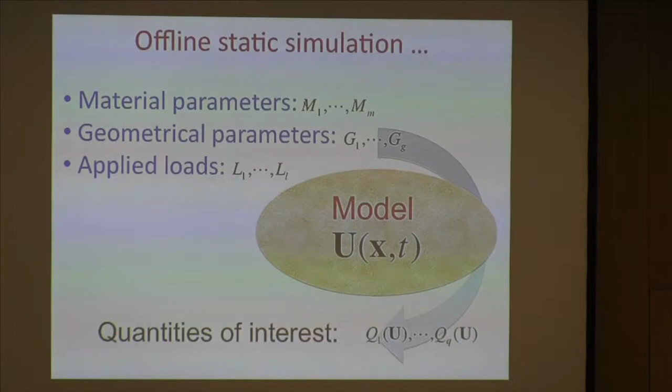So, as soon as you compute your unknown field, you can compute all the variables of interest that depend obviously on this solution. Thus, it's not necessarily the solution itself. It's something that depends on it. And this is the classical numerical simulation. We can conclude: simple, yes, even easy if you have the code. But as soon as you change something, you need to compute again. You push again the button and you wait. So everything is easy, but probably it is not the best solution.

And sometimes you need to solve many times, because you are not only interested in one simulation, you are optimizing or making inverse identification. And in this case, you need to solve again and again. And each time, you need to wait. So, we are trying to solve this faster. And this is not new.

A long time ago, there were some guys that prepared something whose name is the chart, the abaque in French, el ábaco in Spanish. And what is this? This is something that these guys, who had a lot of patience, prepared offline, and in this kind of artistic thing, they introduced all the possible solutions of your problem. And this is very nice, maybe better than the standard simulation codes. Because here you can introduce one parameter, the other parameter, and you have the solution.

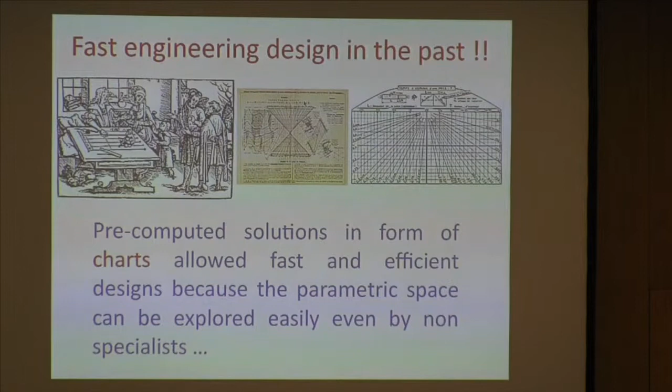Wow, this is nice. I need this. I need to compute all the possible solutions. But probably it's not easy. Because imagine that you have only 10 parameters. 10 parameters is nothing. And that each one can take 10 values. This means that the total number of combinations is 10 to the 10. And even for these guys that have plenty of time, it is too much.

Today, despite the fact that we have very powerful computers, I cannot pre-compute all the possible scenarios in my system. So, this is beautiful, but we cannot pre-compute all the possible scenarios because the number of scenarios explodes. This is the curse of dimensionality. Wow! So, I finish my presentation because there is no discussion.

Or maybe yes, we have some new routes in order to advance to faster and cheaper solutions. And the name of this is model reduction, with many families: meta model, surrogate model, the POD, the reduced basis, and the PGD. PGD is not better than these. It is not worse than these. PGD is one member of the family of model reduction, and as I like it a lot, as everybody knows, I will speak about this. That is one solution. There are many others to perform exactly the same thing that I'm performing now.

What is PGD? PGD has only two ideas. In my presentation there are only two ideas. In my life there are only two ideas. And maybe they are not my ideas, so it's quite simple.

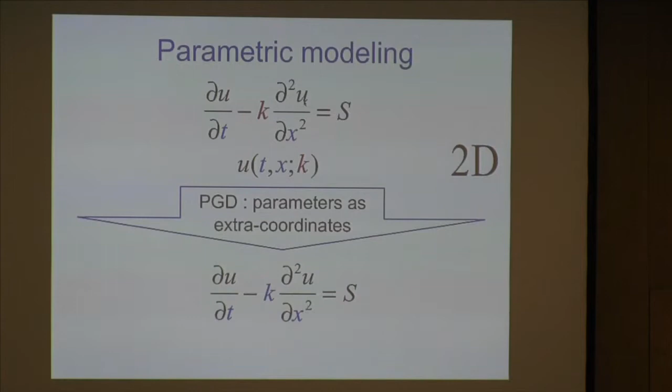Can we perform better? The first idea of my presentation is this. k is no more a parameter. k is a coordinate, like the space, like the time. Why? Because I would like to compute my solution at each point in a domain, at each time in an interval, and for each value of k in an interval. So for me, k is a coordinate in the space. It is a place in which I would like to compute my solution. So there is no difference. Maybe there is no derivative with respect to k, but this is a chance. So, first idea.

When you have parameters, when you have loads, when you have something that you don't know or that can change, you establish this is not a parameter. This is a coordinate. But now my problem was 2D and now it's 3D. And if I continue like this, 4D, 5D, 10D, 20D, 100D, 1000D, maybe it's too much. Maybe, but there is another idea. So, the first idea is clear.

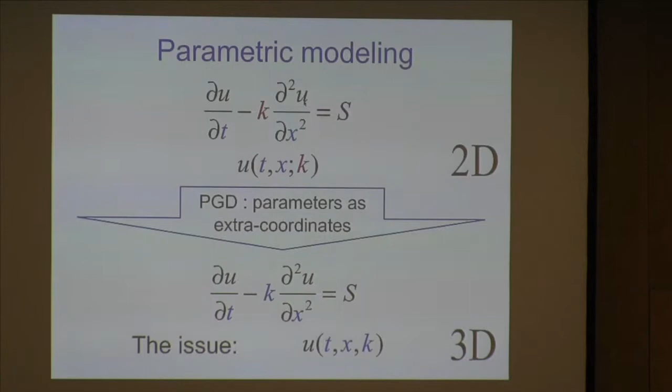The interest is impressive. This is my parametric solution. This is my chart, my modern chart. Why? Because as soon as you change k, you particularize. You don't need to solve again. Because you know your solution at this position, at this time, for any value of k in the interval that you choose. You need to particularize this high-dimensional solution that you computed previously and stored in your code.

And another advantage is if my solution depends explicitly on the conductivity, I could take explicitly the derivative of my solution with respect to k. And you are computing the sensitivity fields. You know at what position you have an important derivative of your solution with respect to the parameter. And this is very important when you are making optimizations.

And if you need second derivatives in order to have Hessians, you compute the second derivative, and third, and fourth. You can compute anywhere, because now my solution depends explicitly on the parameter. Okay, wow, this is nice.

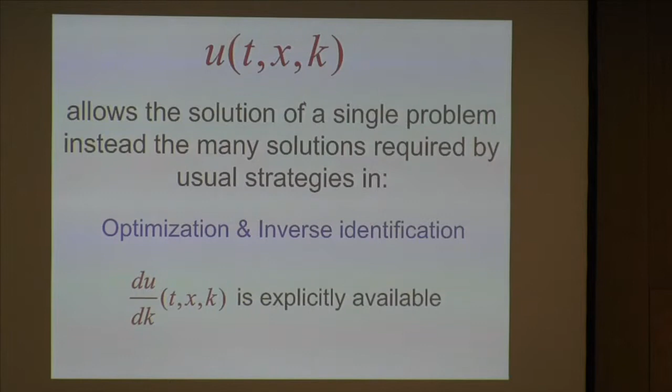And better, even in a stochastic problem, imagine that you know the solution at this position, at this time, for any value of k. At a given point, at a given time, my solution depends on the parameter. And if the parameter is not one value, my parameter is a distribution, my solution is not a value. My solution at this position and at this time has a distribution different to the one of the parameter, but that depends on the distribution of the parameter. So, in a certain manner, we are solving a stochastic problem in a deterministic way. And this is not so bad.

But the problem, very beautiful pattern, but the problem that was 2D or 3D, now we have plenty of dimensions. Okay, I'm very sorry, I will finish now the presentation. No, because there is the second idea.

It is the idea of Fourier, some centuries ago. He proposed the separation of variables. My solution depends on x, t, and k, rather than defining a mesh, one per mesh that explodes with the dimension of the space. You know very well that 1D is easy, 2D not too complicated, and 3D is in general complicated. I prefer to write that my solution that depends on space, time, and parameter can be written as a sum, in principle until infinity, but mathematicians tell you, okay, don't worry, this converges very fast. So in this case, this solution can be written as a finite sum of functions of space, functions of time, functions of the parameter. These functions are unknown, and I need to compute them.

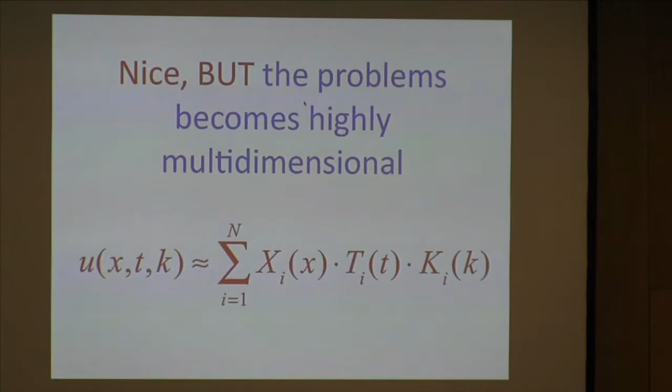How to compute this? Imagine we have my problem, my partial differential equation. I have my weak form, the classical Galerkin weak form that everybody knows. When I start, I'm looking for the first term of this sum. When I look for the first, I don't know this function, I don't know this function, I don't know this function. So the problem that was linear now is not linear, and I need to linearize. The simple linearization strategy is the fixed point, and the fixed point means I take these to start with a random value, a constant value you want. And in this case, as I suppose that this and this are known, I could compute X, because it's a problem with only one unknown, and it's linear.

With this function that I just computed, I compute T1. With the X and T, I compute the K. And I come back, and I have a nice loop here for the treatment of the nonlinearity, and this converges very, very fast. I promise you, very, very fast. And so now you compute the next one. When you reach the fixed point, this is known, and I compute the next one. I fix two, I compute this, with this and this I compute it, with this and this I compute this, and I iterate until convergence. And this converges in general very fast and very well.

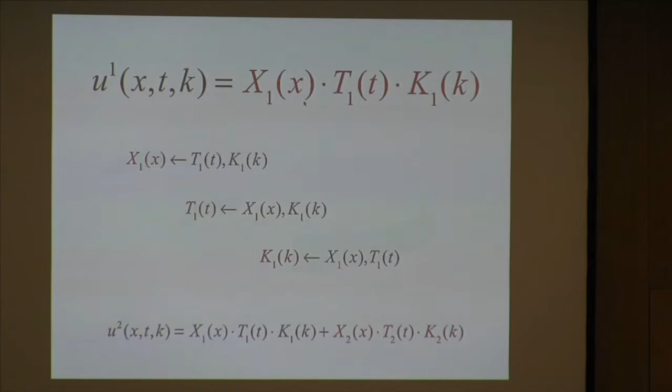And to do this, 8 years ago, with MATLAB and computers similar to this, we introduced a problem in 100 dimensions. 100. We put in each dimension 1,000 nodes. Oh my God! This means the equivalent of 10 power 300. It's incredible. The universe is 10 power 80. This is more than the universe. And I computed this in MATLAB in 20 minutes.

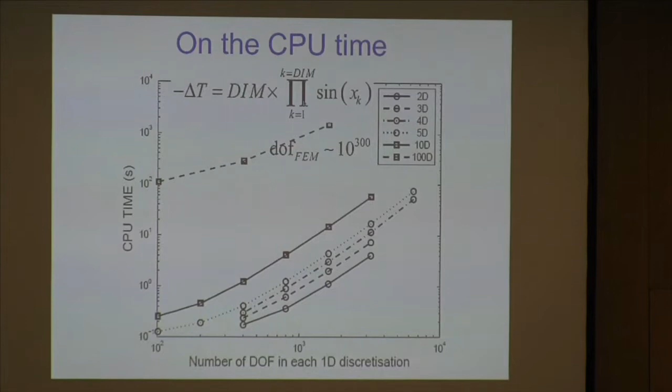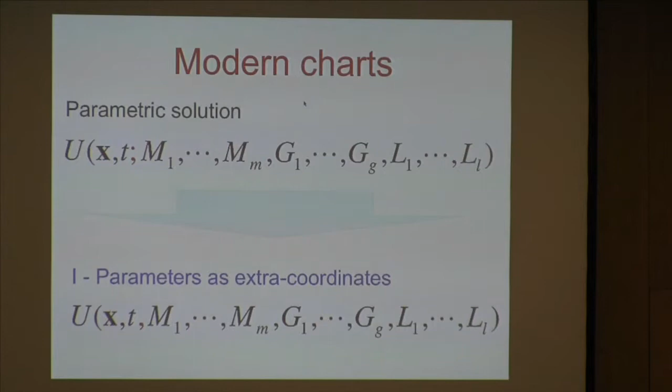Excellent. So we have a nice combination of only two ideas. One idea that is probably not mine, and the other no, because it's Fourier. So I have no ideas, but both run very well. I would like to compute modern charts that are parametric solutions. First idea, all the parameters are now coordinates. Oh, the dimensionality increases. Don't worry. We apply the separation of variables.

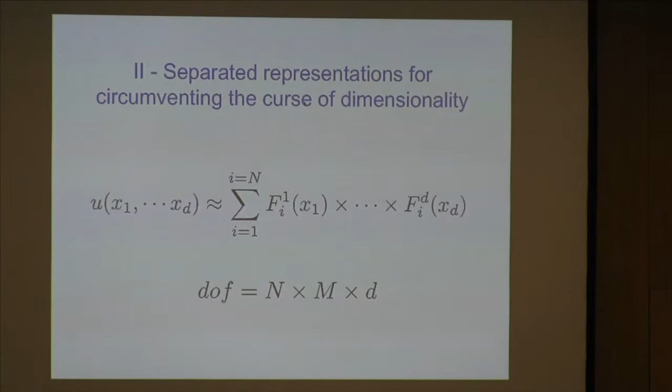And we compute one term of this sum at a time, and we iterate in order to compute this, because the problem is nonlinear. So you need to introduce in your computer two loops, and this converges, sometimes depending on the regularity of the problem, in some hours, in some days, maybe some weeks, but you compute this only one time in your life. Because when you compute this and you finish, you have a chart. And now we can use the chart.

What is the history of separated representations? Fourier, some centuries ago, Pierre Ladevèze a little bit later, because he proposed it.

Pierre proposed to separate transient problems as a sum of functions of x and t. He called this radial approximation, and he introduced this in the famous LATIN method that everybody knows in the world. There are some variants. Pierre also in mechanical problems introduced the separation of frequency and space, and Antonio separated the deterministic and stochastic coordinates to perform stochastic approximation. In my case, my group, my colleagues, Antonio, Elias, etc., we have three originalities.

The first one is to treat multidimensional problems that are coming from physics: Fokker-Planck equation, Boltzmann equation, and Schrödinger equation, problems defined in very large high-dimensional spaces. We apply this dimensional separation. This is one. Second, problems defined in a particular geometry, in a cube, or in a plate, or in a profile, I could separate the coordinates in order to solve a 3D problem with the price of 1D, or the 3D problem with the price of 2D. I will illustrate this later.

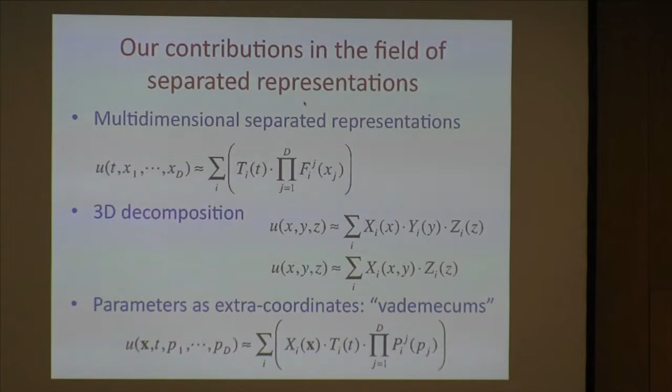And the last one is the Vademecums, the parametric solution. If you have a field that depends on space, time and a number of coordinates, write this as a sum of functions of space, functions of time, and the product of all the functions involving all the coordinates. This is maybe a little bit technical. Everything runs in MATLAB. You compute this only one time in your life, and you have the chart. And when you have the chart, you can perform real-time simulation, efficient optimization, efficient inverse analysis, and simulation-based control.

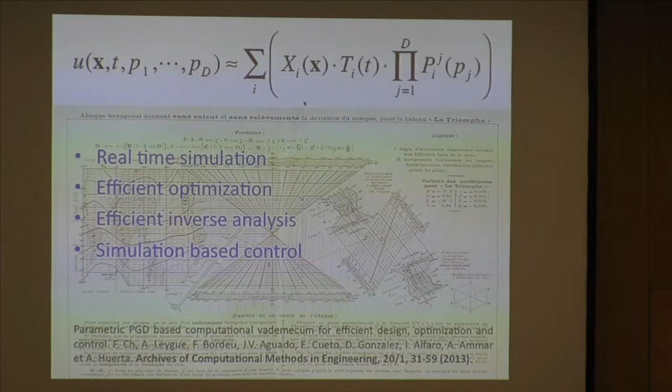So I start with applications, and I come back to one application that Elias just introduced in the other room: real-time haptic devices in which I would like to have an active feedback, very, very fast, for training doctors or for performing surgical interventions at distance. In this case, you need to touch and you need to have the real-time feedback. For your eyes, for having the real-time sensation, you need 25 snapshots per second.

For the haptic, it's a little bit more complex. When you take your finger and during 1 second you slide your finger on the table, there are 1,000 pieces of information going to the mind. This means that in order to have real-time feedback, you need to solve in the order of 1,000 problems per second. But this is not linear. It's anisotropic. Sorry, it's not my responsibility. But you need to solve this 1,000 times per second. This is crazy. Yes, but we need it.

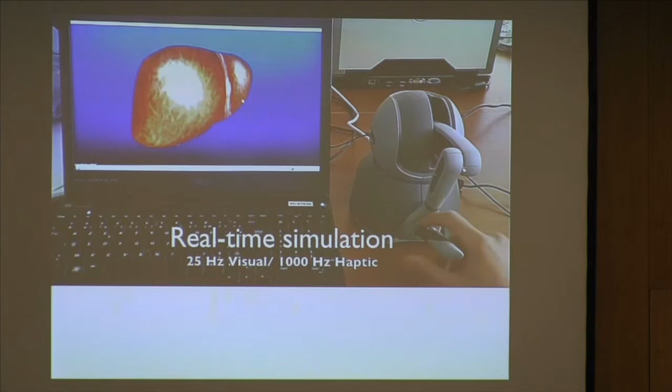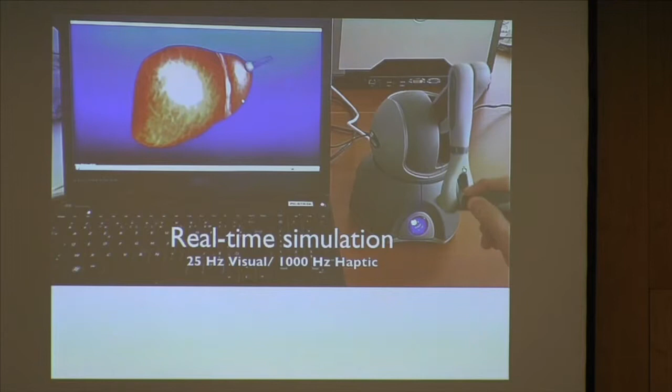There are similar simulations from Zaragoza on the website. This is the liver, and this is Felipe that manipulates this haptic device. And this is nice, real time. Why? Because we are not solving the problem, we are particularizing this solution. Excellent, this is very nice.

Okay, more applications. Another one: plates, shells. This is placed in the aerospace industry, in composite structures. Why? Because we need to solve problems in which sometimes there is not a plate and shell theory, and we need to solve the 3D in a plate or a shell in which the thickness is nothing.

And in this case, we need to use in 3D simulations millions of nodes. We cannot solve this. So we decide to play the game of the separation of variables, and each component of the displacement field writes as a sum of functions of the in-plane coordinates times functions of the thickness coordinate. And a sequence of 2D problems provides the 3D solution. This is 3D solution at 2D price.

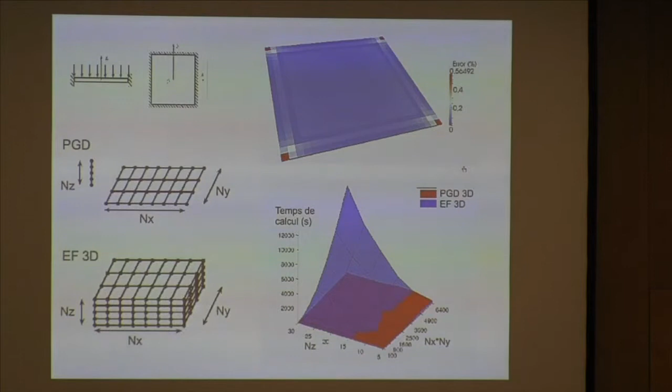Now, and it runs very well. If I compute the 3D solution as a sum of 2D problems and 1D problems, this is the computing time. If you are using a commercial code and you solve the same problem but using 3D elasticity, this is the computing time. Wow, nice.

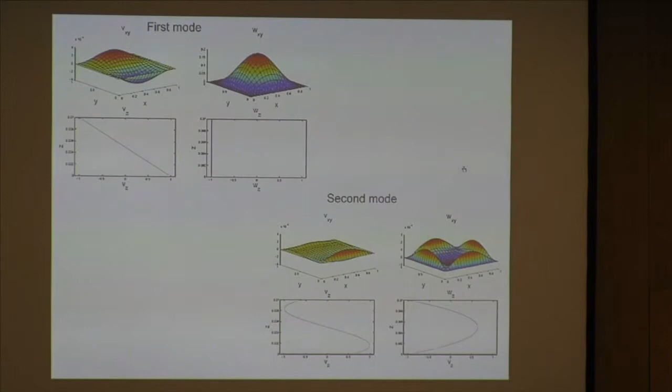If you are looking for the modes, this is the first function, the second, the third. It's very beautiful because the first mode is linear. This is plate theory. The second mode is a little bit more complex, but it only applies in the border neighborhood because there are 3D effects. And there is another thing, which is the angle between the section and the middle plane. It evolves, and when the thickness is very, very small, you approach 90 degrees. With the first mode, you are moving from Mindlin to Kirchhoff. And there is no locking. So this is quite nice.

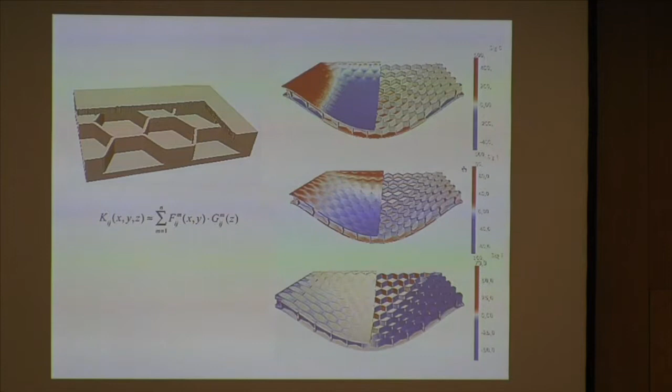You can apply this to complex geometries, because even in this case in which you have not the Saint-Venant principle, and you have not a theory of plates, you can define the elastic properties as a sum of functions of the in-plane and functions of the thickness, with only 3 or 4 modes. And in this case, you can solve the 3D solution of this problem, but at the 2D price. You can apply this to laminates. You have many plies, and we are putting in this direction 100, 1,000, 10,000 nodes, because this only affects the problem that is 1D in the thickness direction.

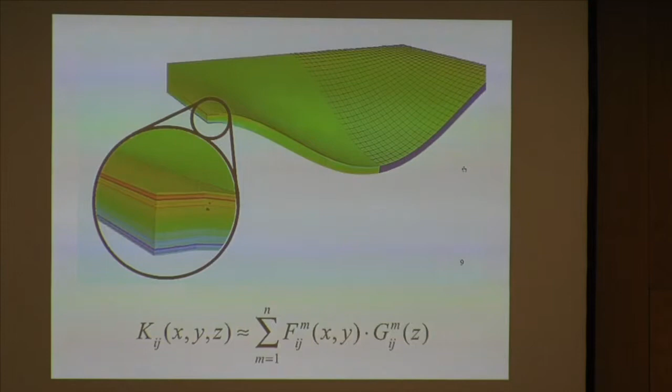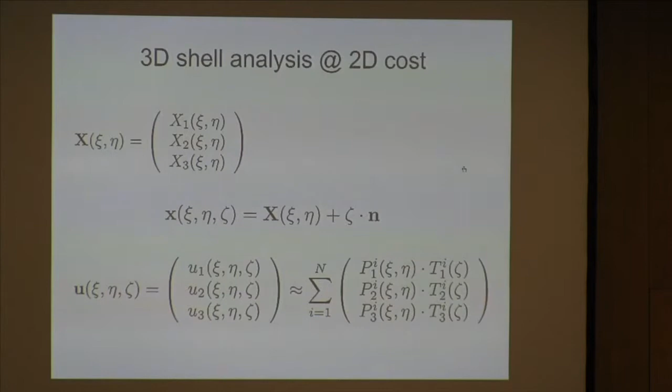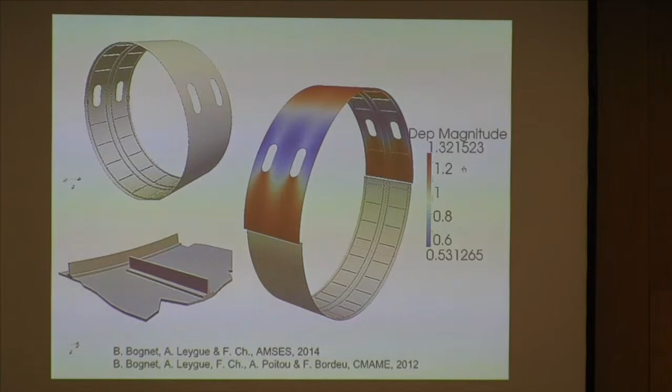You can apply this in shells. You need only 2 parameters, and apply the decomposition with functions defined in the middle surface and functions defined in the thickness of the shell. And then you can compute this. This is a laminate. There are 20 plies. We are putting in the order of 500 nodes in the thickness, and we can solve this complex structure. You will compute the 3D solution of this with a 2-dimensional cost. You compute very, very fast something that is quite impossible to calculate otherwise.

You can apply this also to the fluids in this kind of geometry, because you have this flow. And in this case, it's like a thousand sheets. Look at this, and now when you push, there is the cream that moves outside. And in this case, you need to solve the equations. In the resin part, you have Stokes. In the fiber zone, you have Darcy. We unify both in the Brinkman equation, and we solve this by putting 1,000 degrees of freedom in 1 millimeter of the thickness, and you can compute very fast thanks to the separation of variables, and you can evaluate the flow of the resin, and you can perform this kind of solutions.

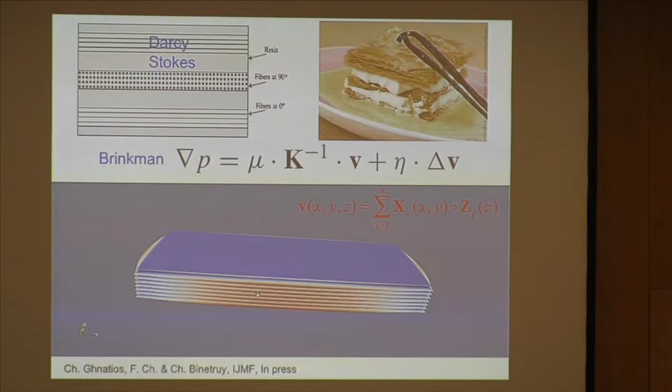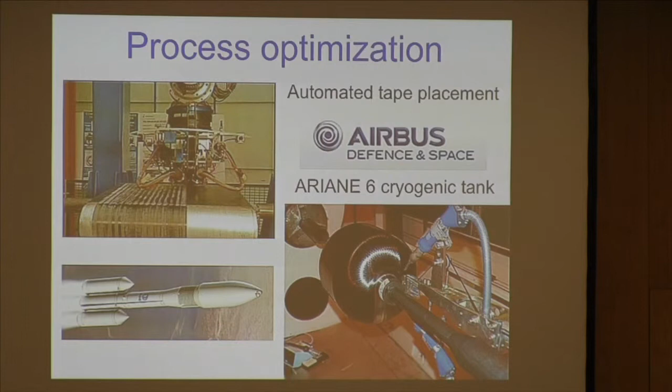Another one in process optimization is when we are performing this kind of processes with composite materials. It's quite difficult because you are laminating and the thickness of the tape is 0.1 millimeter, and the length is of the meter. And here there is no simplified theory, because this is multiphysical coupled, and you need to solve the 3D problem. And in order to optimize the process, you need to obtain the optimal velocity of the line, the optimal power of the laser in order to melt the polymer, the roller push in order to consolidate, and like this you can obtain the parts that exist in future aircraft, like the Airbus 350. And this is challenging because this is 1 millimeter, and this is some tenths of meter.

I'm doing a 3D simulation in which you are interested in optimizing the power of the laser, the velocity of the line, and there are also some thermal resistances because the consolidation is not perfect and there is a discontinuity of temperature through this interface.

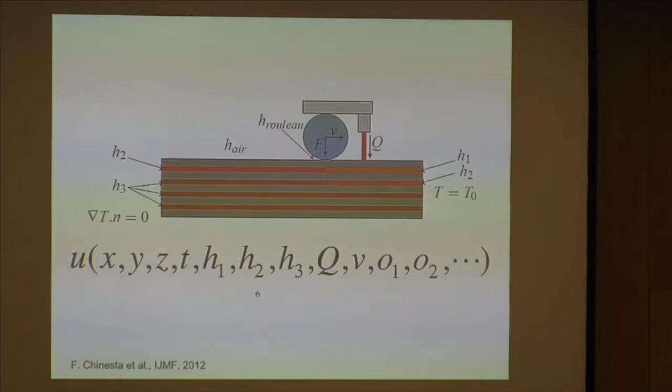And we propose to create a Vademecum that gives us the temperature at this position, at this time, for any value of the thermal resistances, for any laser power, for any velocity of the head, for any orientation of the liners. We solve this problem by introducing 27 coordinates. A simplified model is this. We introduce this in a tablet that is used in Airbus.

And this tablet, with your finger, this is a model chart, you can change any parameter and instantaneously you have the temperature distribution and two indicators, one for the consolidation and the other for the thermal degradation, because if you are applying too much power, you are degrading the result. And in order to appreciate

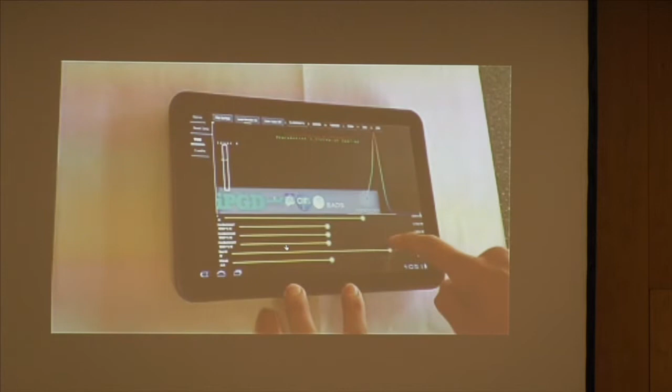the chart, you can appreciate you are changing any parameter, thickness, thermal resistances, the laser power, the velocity, and you can update immediately the temperature, and you can here notice the value of the consolidation indicator and the degradation indicator, and you can provide this kind of chart. And this is used even by non-specialist people in the industry.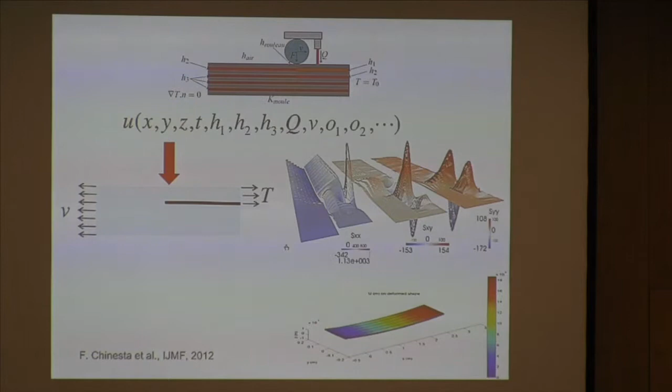And when you do the model with this profile of residual stresses, you can obtain finally the deformation of the part. That is very important in the aerospace industry. Another example is the parametric 3D solution of frame structures that will be presented by Adrien Leygue tomorrow morning in the reduced model session. And in this case, we would like to optimize this kind of frames.

It is composed of 6 beams that are in this position in the aircraft, A320. And in order to optimize this, we need to choose the optimal flanges thickness and the optimal web thickness. The problem is each beam is composed of a lot of elementary beams, and each one has 3 degrees of freedom, 3 parameters for the design. And this means that in all this structure, we have 148 design parameters, and we need to try to optimize this as fast as possible.

And this means, finally, we create, this is the 3 typologies of elementary beams. We create 3 abacus, one for each kind of beam, by considering the length, the 2 flanges thickness, and the web thickness as extra coordinates. And like this, we have a kind of Lego that I can assemble in order to have any structure.

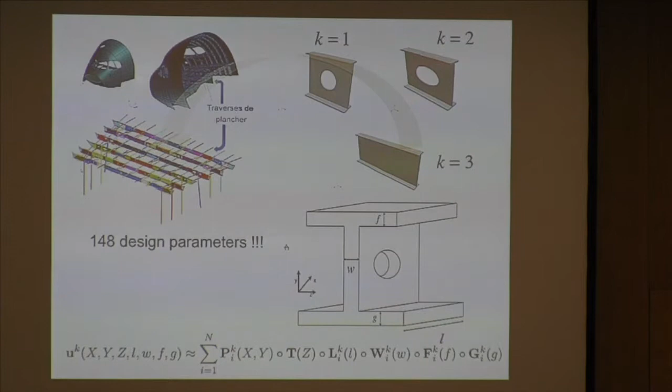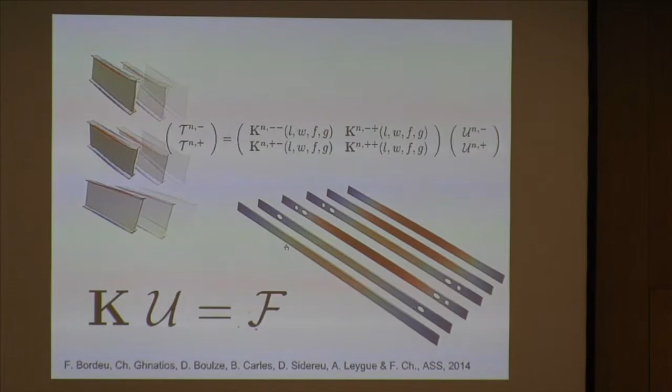So we have a kind of parametric structural analysis, and after when you compose all your Lego, you can assemble this in the stiffness matrix, and you can solve in less than 1 second, and you are computing the 3D solution everywhere, in any point of this system. So it's not exactly the classical beam theory. Here we are using a kind of 3D parametric beam theory in order to compute this. So for more details tomorrow, in the room.

And the last example is using the reciprocity principle in order to perform real-time thermal analysis. This is a collaboration with Antonio Elias. And imagine that you have the weak form of the heat equation. You see the form, yes? Okay, this is nice. Imagine that in this part of the boundary, the Neumann part, you apply a flux Q1. In this case, you obtain a solution U1.

Imagine that you apply a source term Q2. You obtain a solution U2. So you have for Q1 this solution, and for Q2 this solution. Now, I could assume that for the test function in this problem I could take U2. And for the solution of problem 2, I could take the weight function coming from problem 1. And I take this minus this, and I obtain this.

If my problem is steady state, there is no derivative, we obtain something whose name is the reciprocity principle, that I like a lot. Why? Because if I construct an artificial problem 2, I apply Q2 and I obtain U2. I can perform this offline. And now online, you enforce a Q1, and this integral gives you instantaneously the U1 in any point. And if you know U1, you can identify Q1.

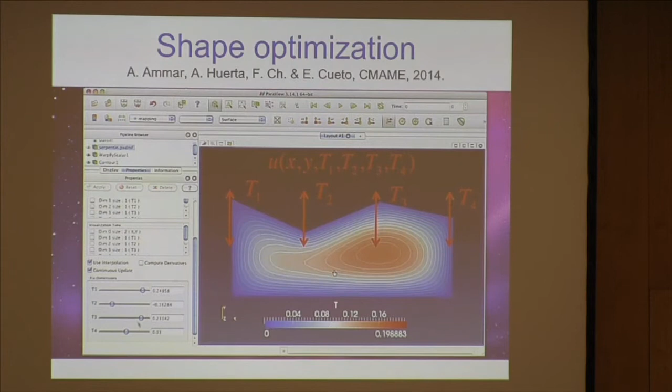There are other applications where we are computing topological optimization. We have applied this also in shape optimization, in which you can compute a solution for any geometry. And now again, Felipe is moving the control points that define the domain, and in real time we are predicting the solution because previously offline we constructed this kind of Vademecum that is the solution at this position for any position of the control points that define the geometry.

So I finish on time, and the main conclusions are: first idea of the session, parameters are no more parameters. Parameters are coordinates. Which kind of parameters? Model parameters, initial condition, boundary condition, geometrical parameters, everything. Second idea, by doing this my problem becomes multidimensional, but don't worry, don't panic. We have the separation of variables. And this means that in an iterative way, by solving low-dimensional models, I can compute the solution of a high-dimensional model in 20 dimensions, in 50 dimensions, or 100 dimensions in theory. Everything is not so pink like in mathematics.